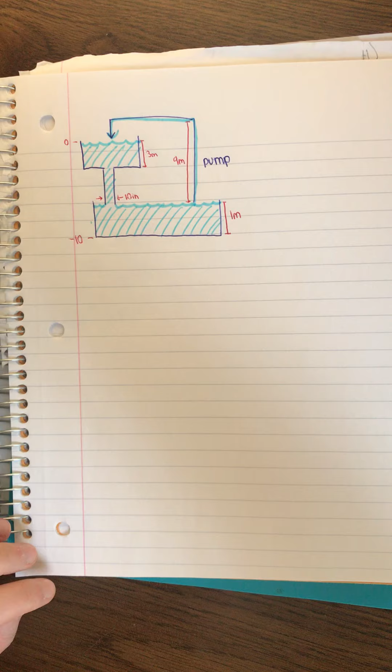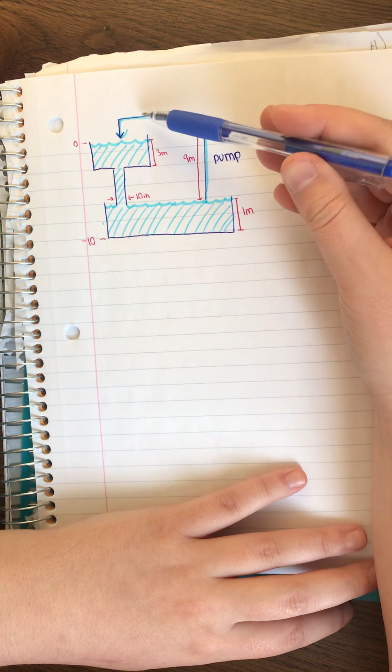Okay, so this is transport's homework number 4, and what we're given is this system in which we have a holding tank and water that flows down a pipe into a jacuzzi, and this jacuzzi is kept at a constant height of 1 meter by pumping water from the jacuzzi back into the holding tank. So basically what we want to figure out is how much power is needed for this pump in order to pump the water back into the holding tank.

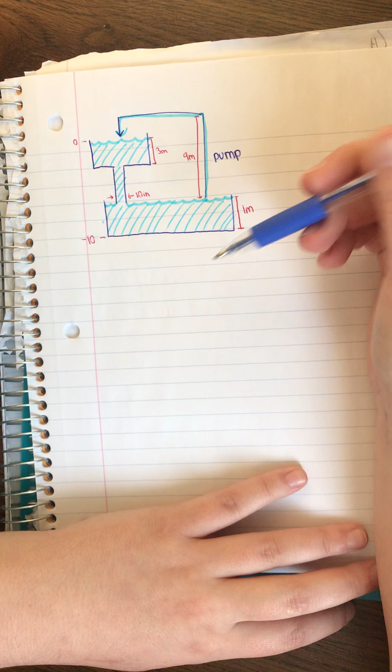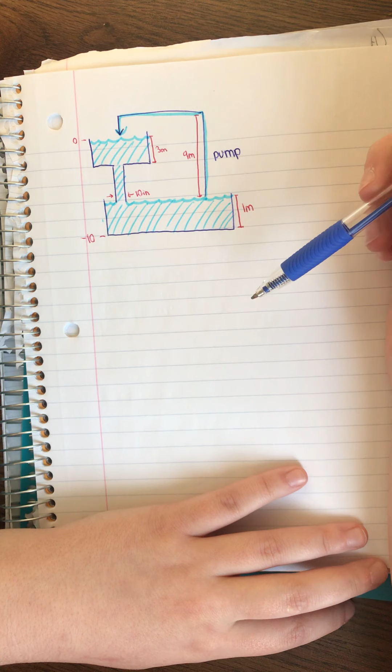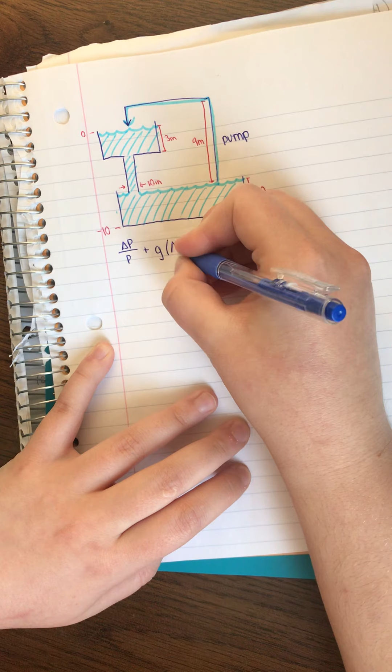We're also assuming that in this system, all of the water going in is equal to the water coming out. So because we're assuming this, we're going to use Bernoulli's energy balance equation, which is the change in pressure over rho, plus gravity times change in Z, plus VB squared minus VA squared all over 2, and this is equal to the work over M

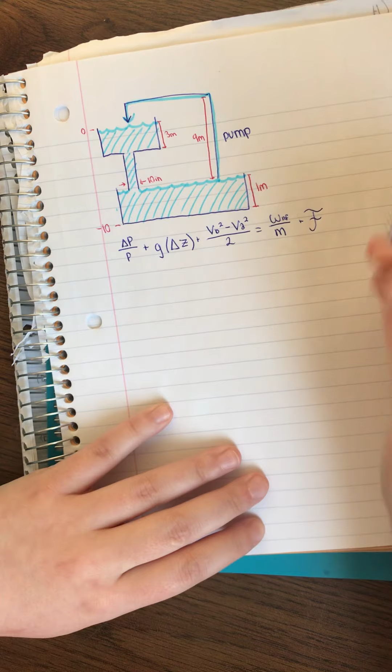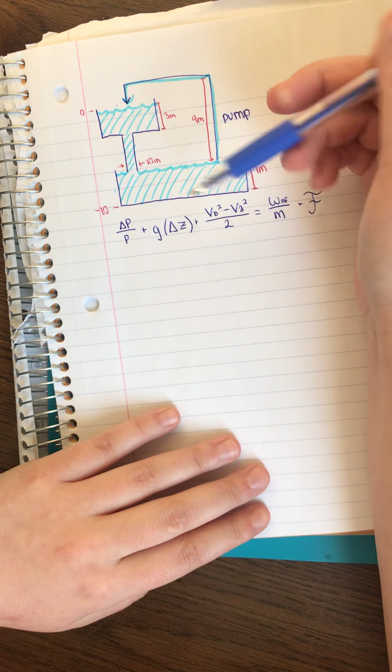plus this F. So basically what we want to do is simplify this equation according to our system. The first part we're going to look at is we're going to break this into 2 sections, starting with the water that's going in. So we'll take this from this point until this point. This is going to be P1, this is going to be P2. We're assuming this is our starting point, so I have this at 0, and this is our ending point, so I have this at -10 according to the measurements we were given.

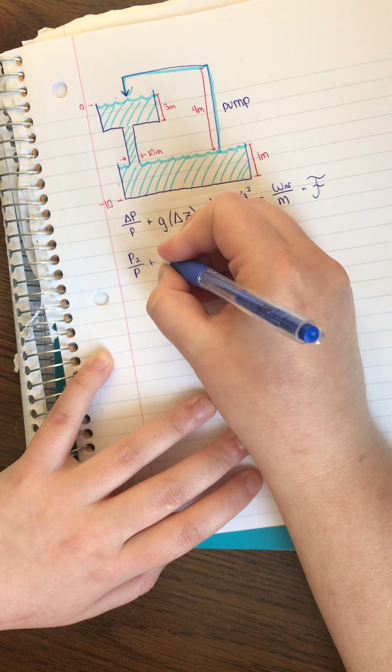So simplifying this equation down according to what we have, we're left with P2 over rho plus gravity times -10, plus V2 squared over 2, and this is all going to be equal to 0.

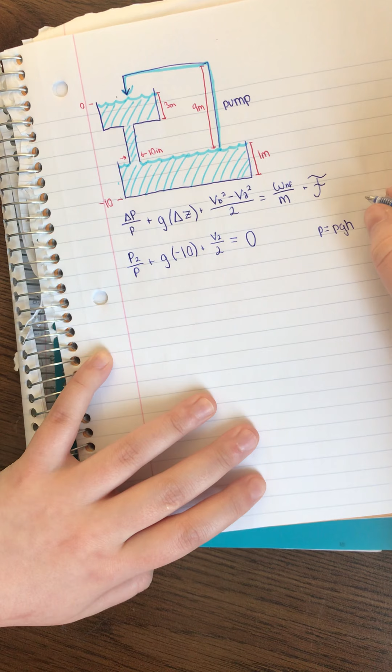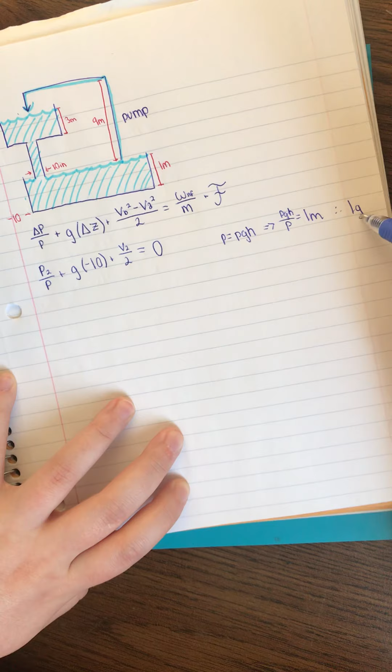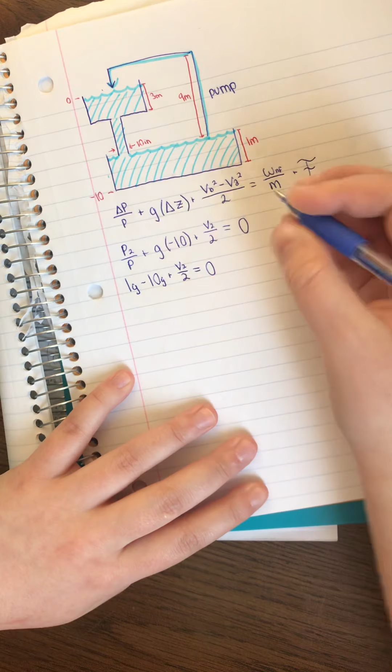And so we know that pressure is equal to rho times G times H, and we know that this height is always kept at 1 meter, so we can have this equal to 1 meter, and when we do that algebra, that just turns into 1G. So we can go ahead and plug this back in, and when we do that, we get 1G minus 10G plus V2 squared over 2 equals 0. So now we want to solve for V2, and when we do that algebra, we get V2 is equal to the square root of 18G.

And then we need to figure out what our flow rate is. So we're going to have Q, and we know this is our velocity times area. And then we want to solve for V2 because that's what we have here. So when we do that algebra, we get V2 times, this is our area, squared.

So what we're given is that the diameter of this pipe is 10 inches, and we need the radius, so we know the radius is equal to 5 inches, but we need to convert this to meters, and when you convert it, this turns into 0.127 meters. So when we plug that back in, basically we have 18G times pi times 0.127 squared. And then we're going to remember that, so we'll just set that aside.

Now we're going to go to the second part. The second part is we're going to try to find out the water that's leaving the jacuzzi. So we're going to use Bernoulli's equation for this again, but this time we'll simplify it according to this point within the jacuzzi to this point. We're going to refer to that as P3 and P4. So when we simplify this equation according to these 2 points, we're left with G times Z4 minus Z3, which is equal to the work, because there is going to be work.

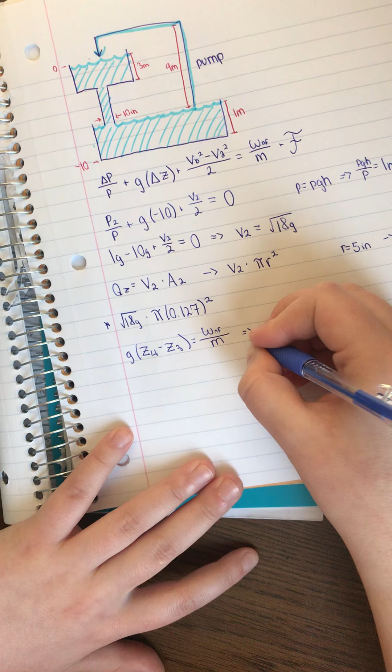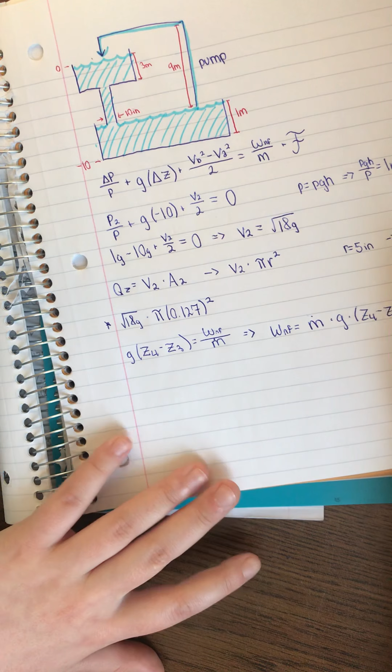So from this, we want to solve for the work. And when we solve for work, we get... oh, I forgot these, okay... times gravity times Z4 minus Z3. And we know from the measurements given that this is going to be equal to 9 meters. There we go, okay.

And so we have this, this is our volumetric flow rate. And what we have to do is change this into a mass flow rate. Since we're dealing with water as our liquid, we're going to multiply this by the density of water. So when we do that, we're just going to have our 18g times pi of 0.127 squared times the density of water.

And then so when we want to determine our power, we know that power is equal to our density times our 18g times pi times 0.127 squared times 9.81 times 9 meters — this is the density I should have put there. Okay, and then when we do the math for that, we get power is equal to, this is 1,000 kilograms per meter cubed

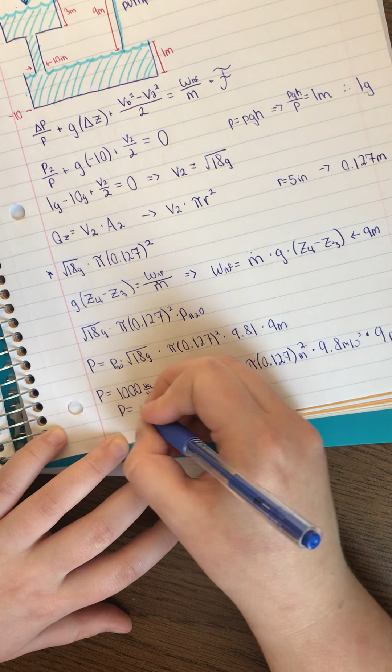We're going to use 9.81 for gravity, this is our pi again, 0.127, so that'll be in meters — squared — and times our 9 meters. And when you do all of this calculation and get the units converted, we get that our power is equal to 60 kilowatts.

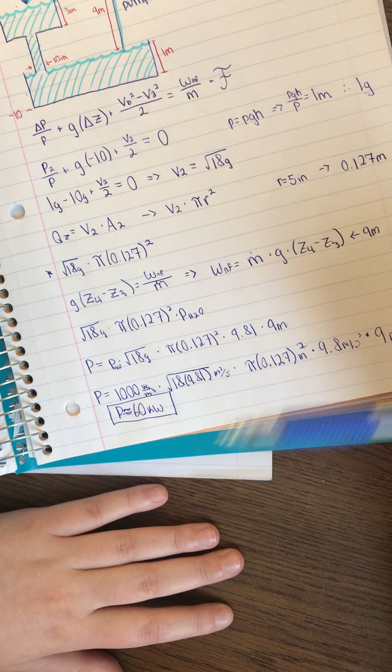About 60 kilowatts. And since we know that there is power needed to be put into the pump, this power is going to create heat. Therefore, we're going to need a chiller in order to keep the temperature at a constant rate to combat this heat that's being produced.